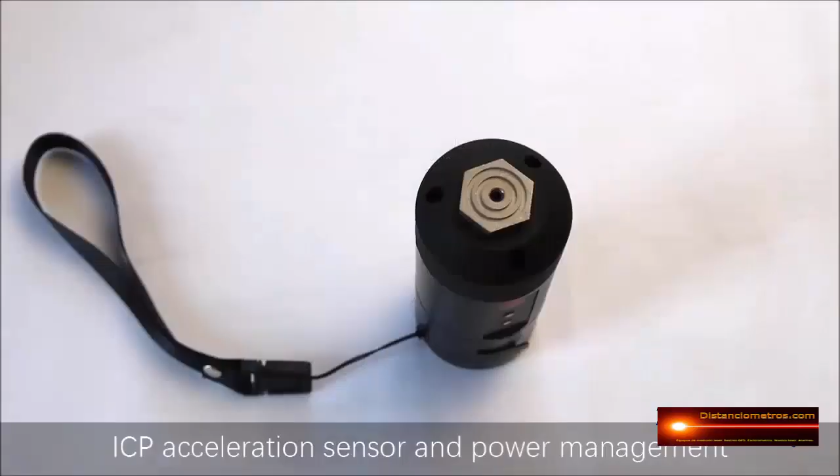The instrument consists of a host, Huawei tablet, hammers, and other accessories, and a power management circuit, etc. are all enclosed into the dynamic detector host. The hexagonal metal part at the bottom of the host is the ICP acceleration sensor.

This red button is the power switch. The charging indicator is just above the power switch. It is red when charging and it turns green when the host's battery is full. Above the charging indicator is the working indicator.

If the working indicator is red, it means the host is in low power condition. If the working indicator is green, the host can work normally. And if the working indicator flashes red and green, it means the host is pairing with the pad.

Open the protective cover, you can see the charging part. You'd better cover it when not in use so as to protect the host. Our specialized software is installed in the pad with Android system, and the software can transfer, analyze, and store the test data received by the host.

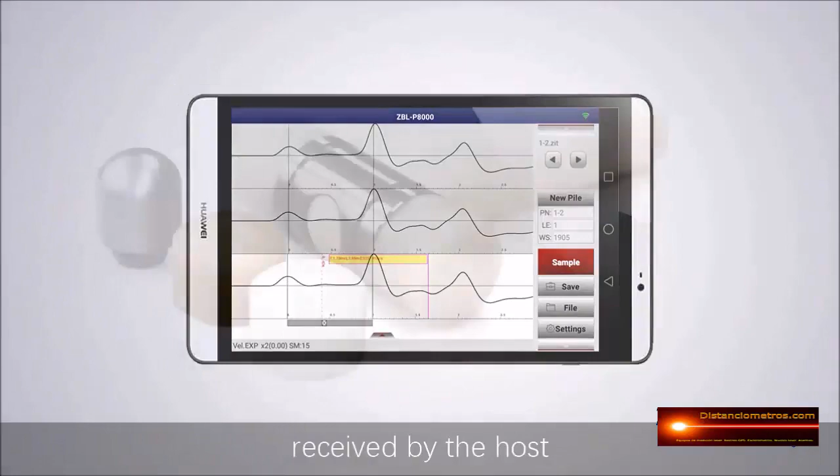Hammer. We use the hammer to strike the top of the pile to produce a stress wave. We provide you several hammerheads of different weights and materials.

The stress wave frequency caused by the striking of the aluminum alloy hammer is pretty high, which is suitable to judge the shallow flaws of a pile, while the stress wave frequency caused by the striking of the nylon hammer is rather low, which is suitable to judge the pile's deep defects. Besides, you can purchase another force stick as a striking device if the pile you test is too long and big.

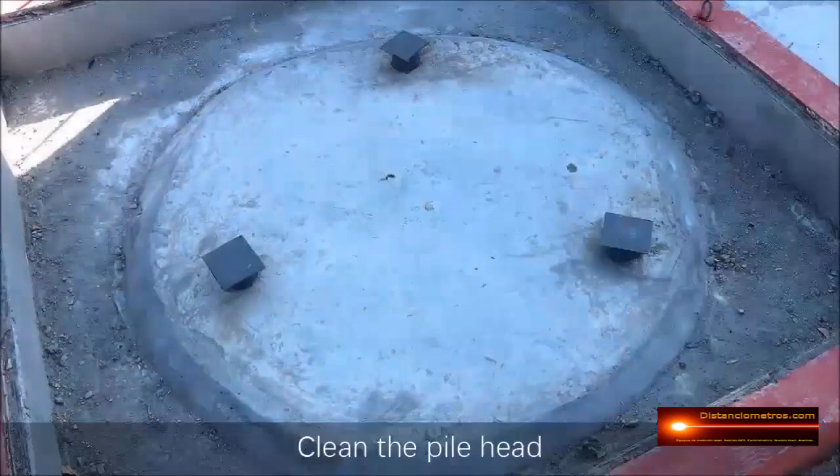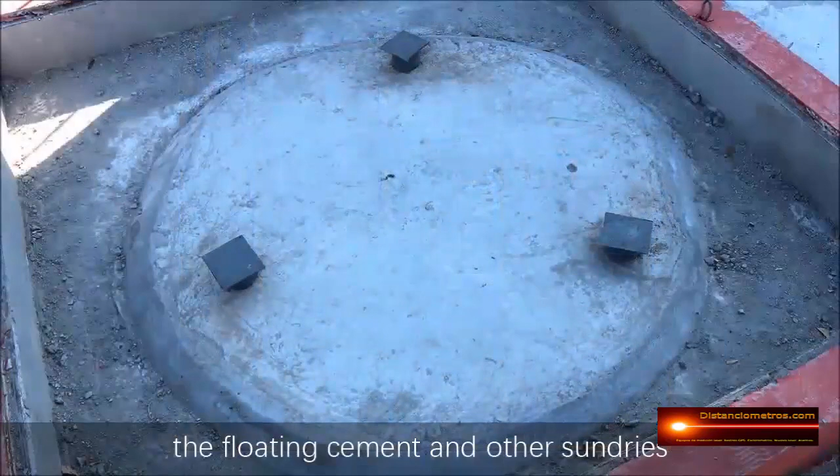Instructions. We should do some preparations before testing. Clean the pile head. The coupling point of the sensor and the striking point of the hammer must be clean, flat, and hard, so it is necessary to treat the pile head before testing. Clean the floating cement and other sundries on the pile head. The coupling agent should be thin but with great viscosity, and this viscosity should not be affected by water. We use butter here.

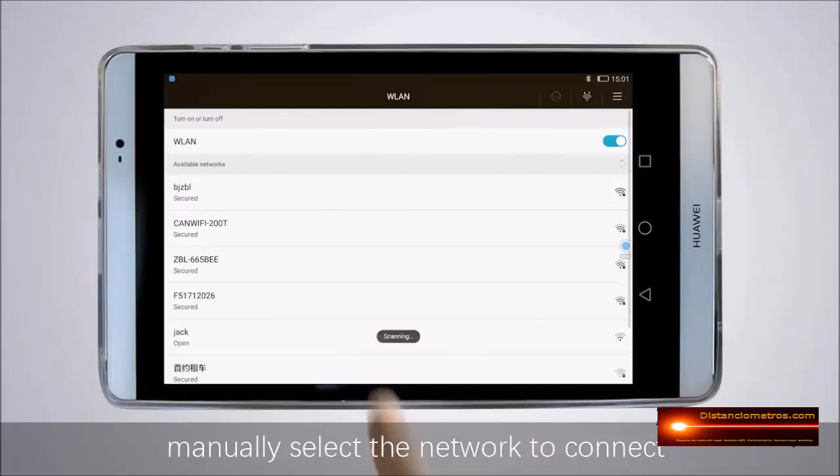Press the power switch to start up the instrument. Turn on the pad and find the application P8000 wireless pile dynamic detector on the desktop, and then click and open it. Click the Wi-Fi icon on the upper right corner to enter the network setting interface. Manually select the network to connect and input the right password. After a successful connection, the Wi-Fi icon stops flashing. Battery level is displayed.

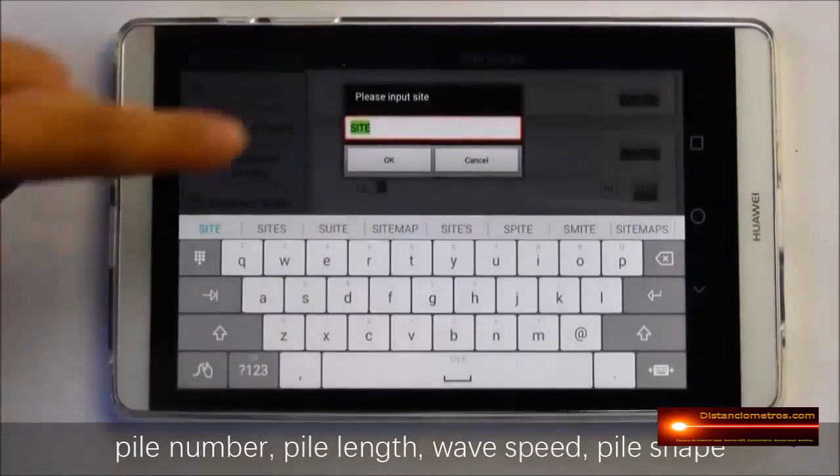Parameter settings. Click the Pile parameter button. You can set a project name, pile number, pile length, wave speed, pile shape, pile diameter, and pile type according to the project's real information.

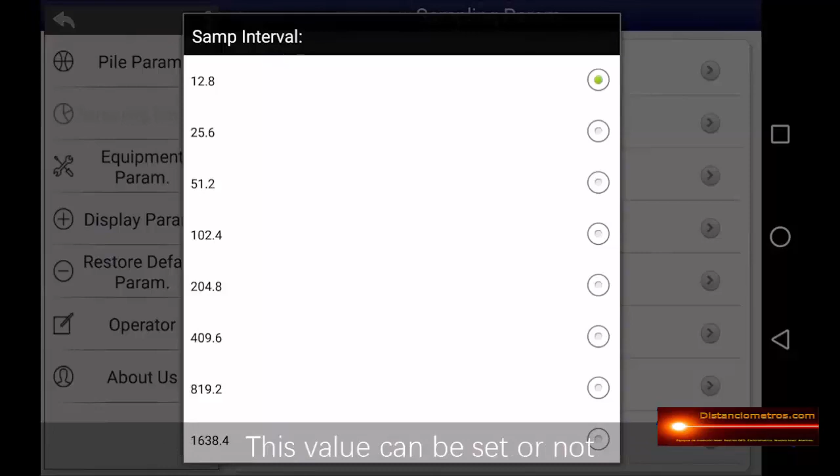Click the Sampling parameter button. Sampling interval refers to the time interval between every two sampling signals. You can select one of the 9 intervals. The value can be set or not, but pile length and velocity must be set before sampling so that it will automatically calculate the sampling interval value.

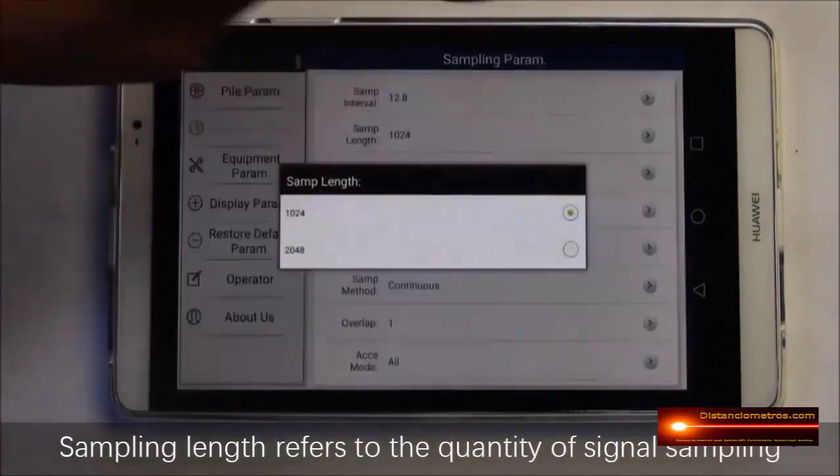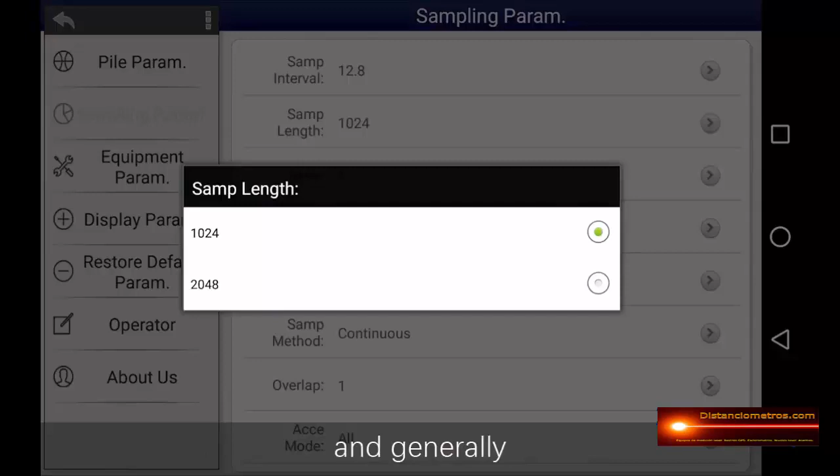Sampling length refers to the quantity of signal sampling points, and you have two choices, 1024 and 2048. Generally, 1024 can meet your requirements. Blow number refers to the total number of waveforms that every channel selects. There are multiple options. Minimum is 1, maximum is 12.

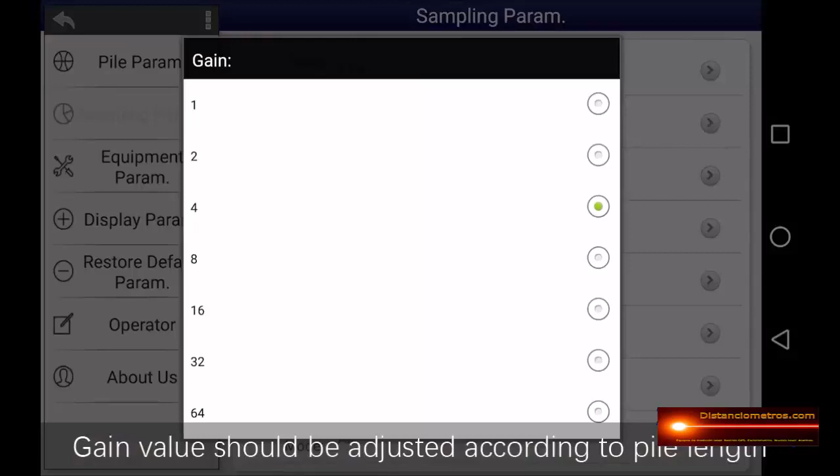Gain refers to the amplification factor of the signal which is received by the sensor. Generally, the gain value should be adjusted according to pile length, condition of the pile head surface, and striking equipment, hammer, etc. When the signal is weak, you can turn up the gain value. When the signal is strong, you'd better turn down the gain value.

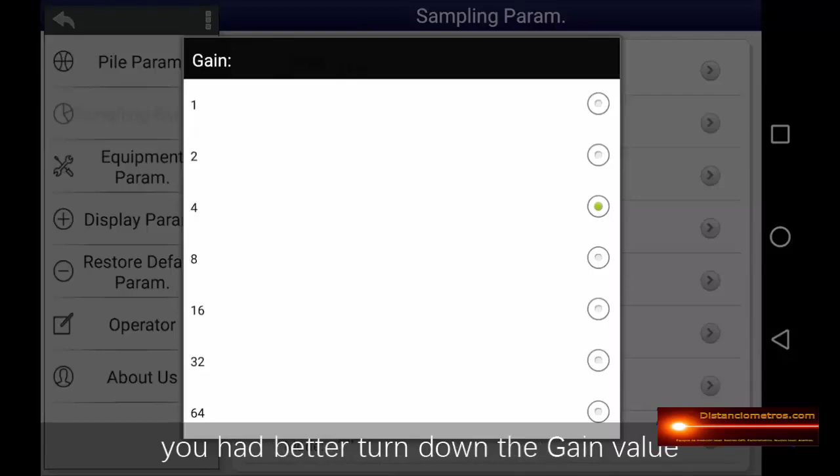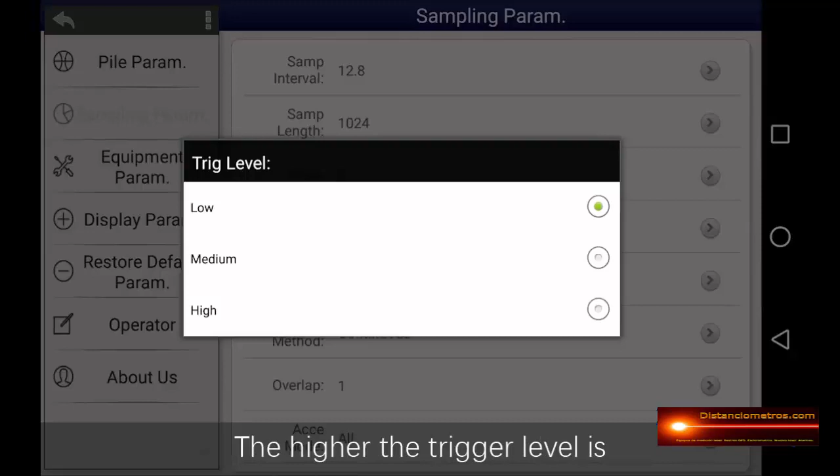Trigger level refers to the signal level collected when starting the instrument. There are 3 levels, low, medium, and high. The higher the trigger level is, the stronger the signal required. Generally, you'd better choose low level when the gain value is less than 8, and you'd better choose medium or high level when the gain value is more than 8.

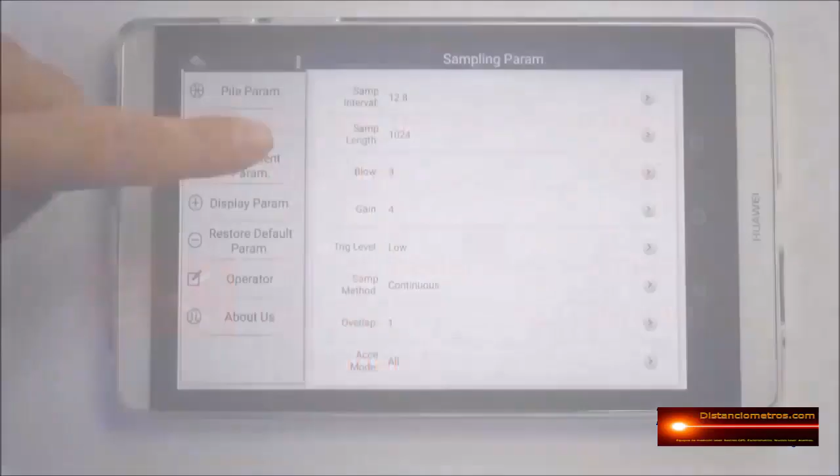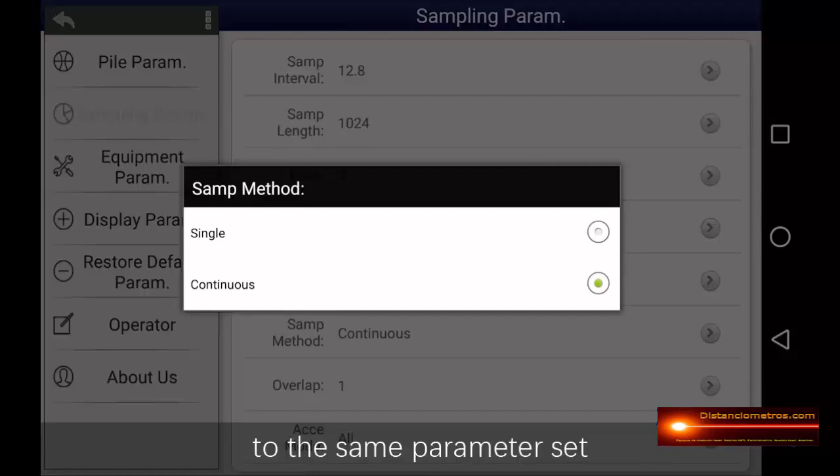Sampling method. There are 2 methods, single collection and continuous collection. Single collection means according to the parameter setting, only one waveform can be collected once. Continuous collection means according to the same parameter set, continuous multiple waveforms can be collected until the acquisition is stopped.

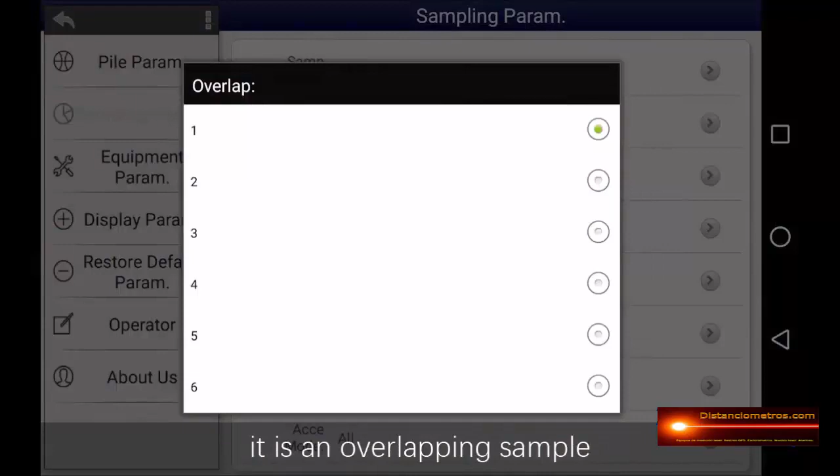Overlap. You can choose a number between 1 and 6. If the number is bigger than 1, it is an overlapping sample, which means all the samples collected in the same channel will be added together and then averaged.

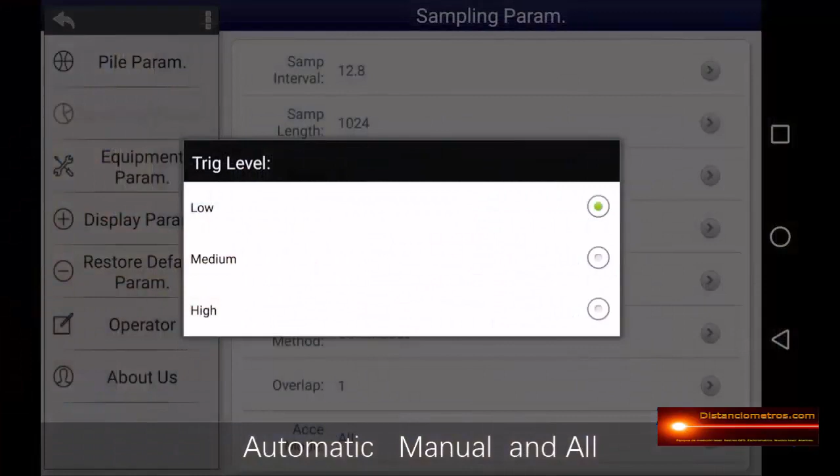Acceptance mode. 3 modes are accepted: automatic, manual, and all. In automatic mode, if the strike is too heavy or light, the dynamic detector will automatically abandon the signal while showing the corresponding message. Only when the percussion is moderate will the collected signal be a useful one.

In manual mode, if the strike is too heavy or light, the dynamic detector will give an appropriate message and ask whether to retain the signal or not. When the all mode is selected, if the strike is too heavy or light, the dynamic detector will give the corresponding message and keep the signal.

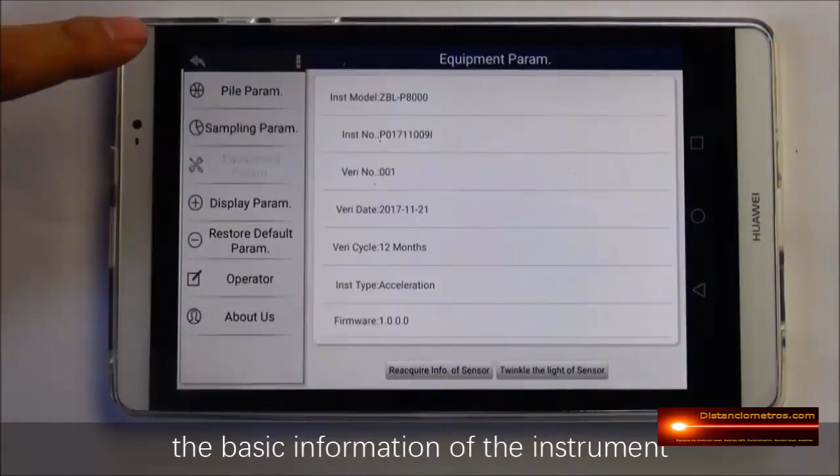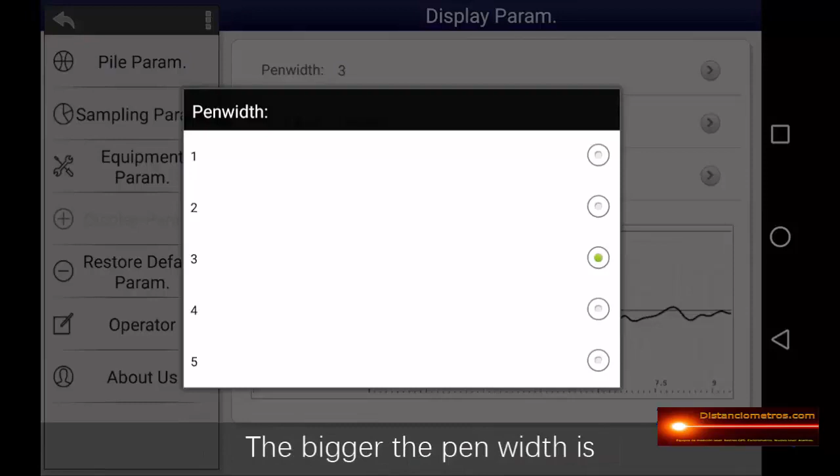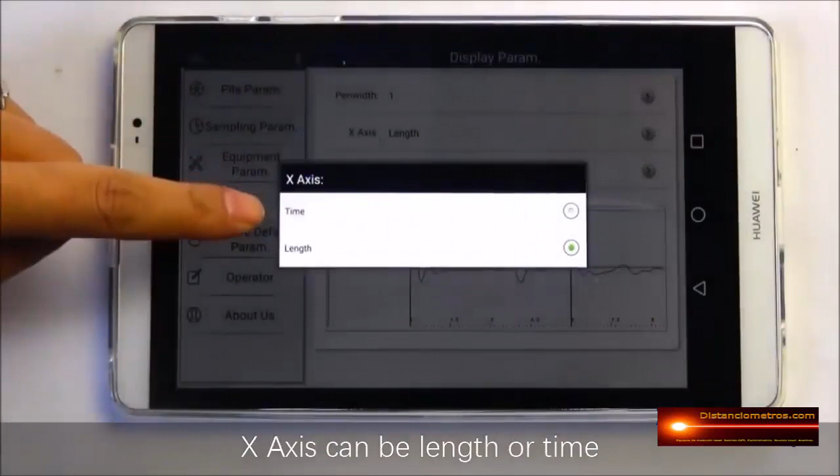Equipment parameter shows the basic information of the instrument. Click Display Parameter and it switches to the Display Parameter interface. Pen width refers to the width of a signal channel waveform. The bigger the pen width is, the wider the waveform is, with the default as 1. X axis can be length or time, and generally we choose length.

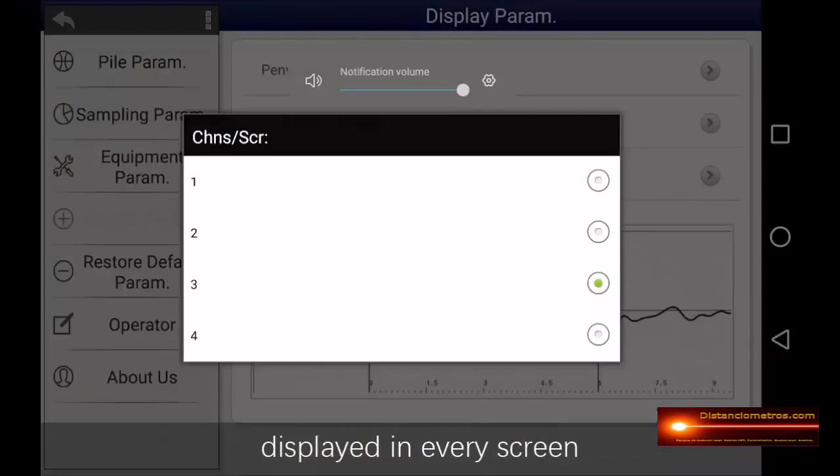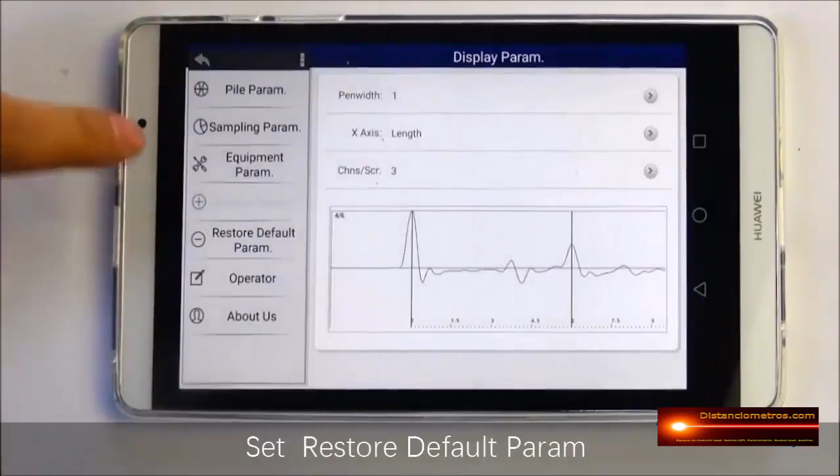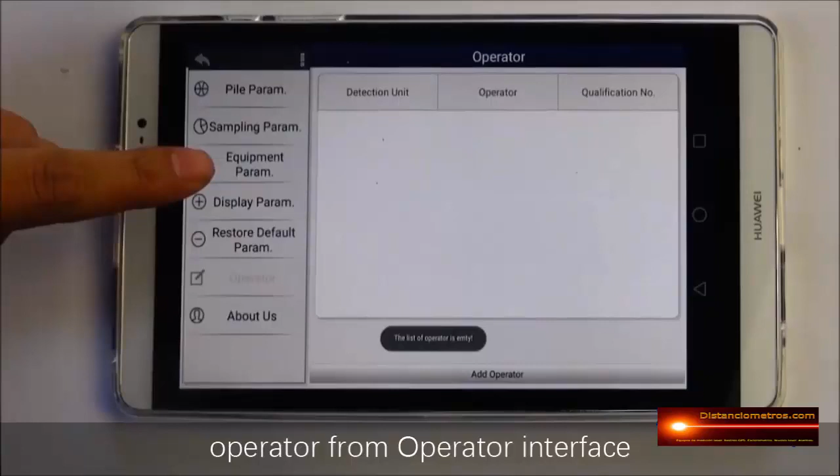Channels per screen refers to the amount of waveform display in every screen. Options are 1, 2, 3, or 4. The number in every panel cannot be bigger than the sampling number. Set restore default parameter. You can choose to recover some parameters. You can set the information of the operator from the operator interface. After setting all parameters, return to the sampling interface.

Pile test. You can choose 1 to 4 testing points according to how big the pile is. Defects or cracks are not allowed at the installation points of the sensor or somewhere near it. When the hammering point is at the center of the pile head, the distance between the installation point of the sensor and the center of the pile shall be 2/3 of the pile radius.

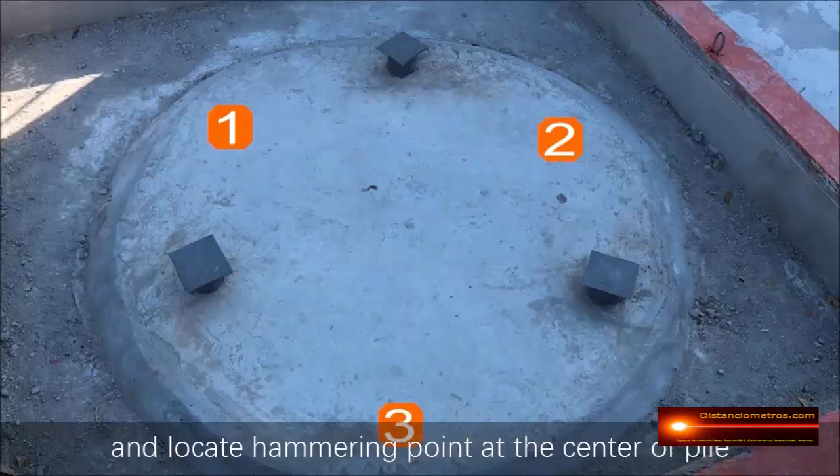When the hammering point is not at the center of the pile head, the distance between the installation point of the sensor and the striking point shall be more than half of the radius. Take a 1 meter diameter pile as an example. We choose 3 testing points and locate a hammering point at the center of the pile. The sensor and the testing point should be completely stuck together by butter or petrolatum, and ensure the sensor is vertical to the top of the pile.

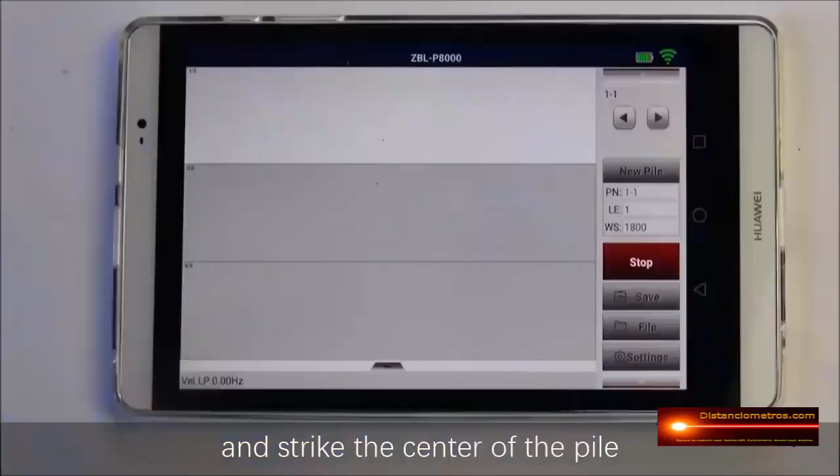Click Sample button. Place the sensor at the first testing point and strike the center of the pile 3 times with the hammer. Click Stop button. Then place the sensor at the second testing point and strike the center of the pile 3 times with the hammer. Click Stop button. At last, place the sensor at the third testing point and strike the center of the pile 3 times with the hammer again. Click Stop button after you have finished the sampling work.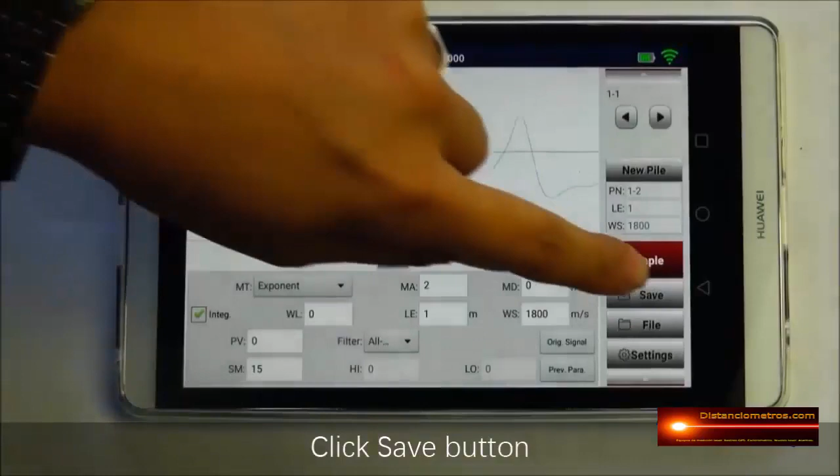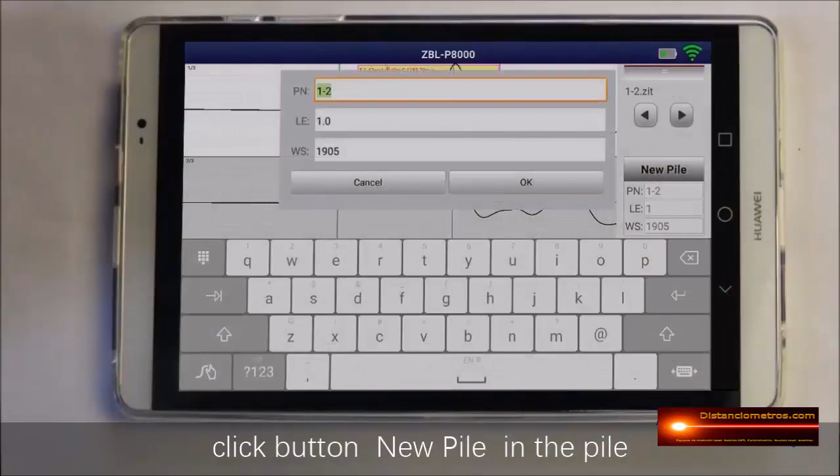Click Save button. The default name is the pile name set before the test, and you can save directly if you don't need to change it. Then we finish the test of the pile. If you need to continue to test other piles, click the button New Pile in the pile information area on the right side. Then you can continue to detect the next pile.

After you have tested all the piles, data can be transferred to your computer for analysis and report generation. Click File button and select FTP Upload. Enter username and password, and click Start button. The IP address for data access by PC will be generated.

Input such IP address in the computer address bar according to below suggestive address. A dialog box will pop up asking you to enter the same username and password. Then you can find out all data files. Select data files and copy them into PC.

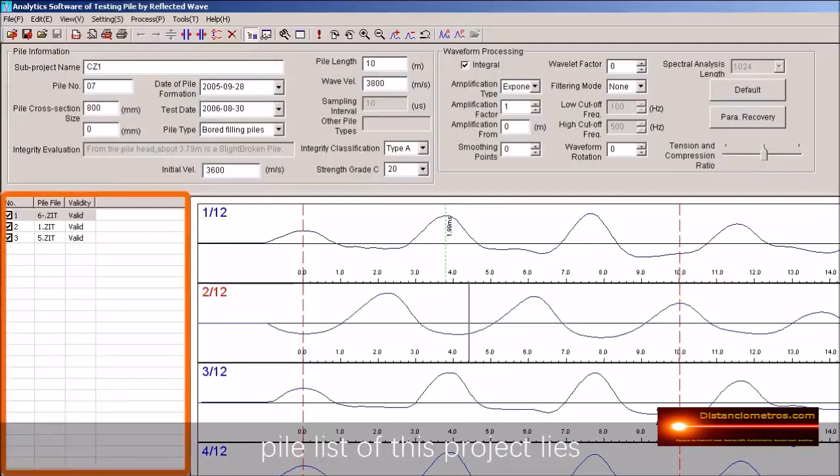Data analysis. Click and open Analytics software of testing pile by reflected wave. Click File button and find the file you want to analyze and open it. The middle part of the software interface is wave diagram area. Pile list of this project lies on the left side of wave diagram area. Pile information area and waveform processing area lie above wave diagram area.

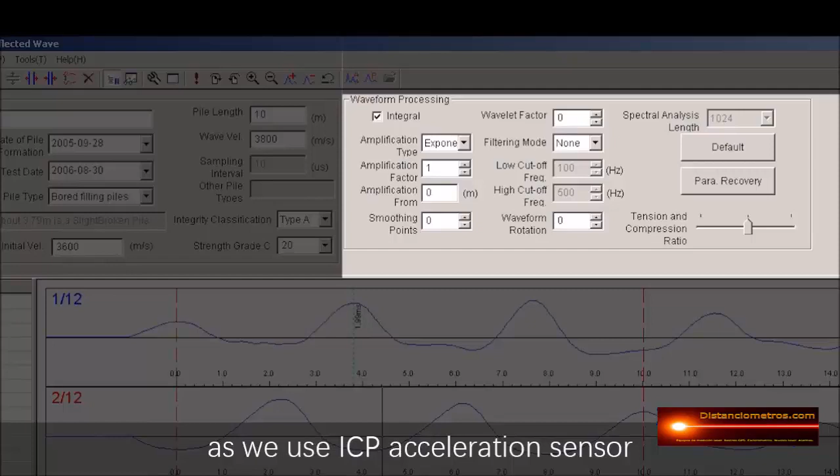You can further improve or modify the pile's information in pile information area on the left side. Look at waveform processing area on the right side. You should choose integral as we use ICP acceleration sensor. Wavelet factor can optimize the signal through wavelet analysis method. And the bigger the wavelet factor is, the smoother the signal diagram is.

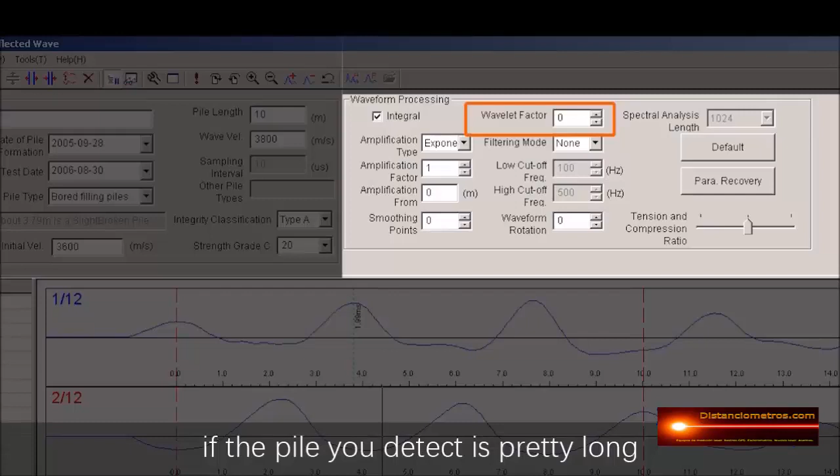Generally, wavelet factor should be set between 1 and 3, but you can set a bigger wavelet factor if the pile you detect is pretty long. If the wavelet factor you set is too big, some useful signals will be filtered out, causing misjudgment.

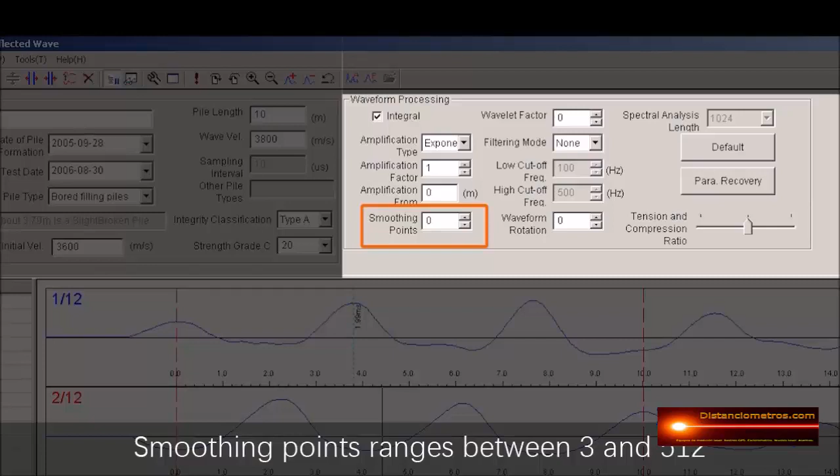Smoothing points refers to how smooth the signal diagram is. The bigger the smoothing points is, the smoother the signal diagram is. Smoothing points range between 3 and 512, and generally it is set at 10.

Amplification type, you have 3 kinds of choice: exponent, linear, and full scale. Usually, we select exponent. Its characteristic is the signal will be magnified on exponent. As for amplification factor, you can choose according to your need. Amplification from means the starting place to magnify.

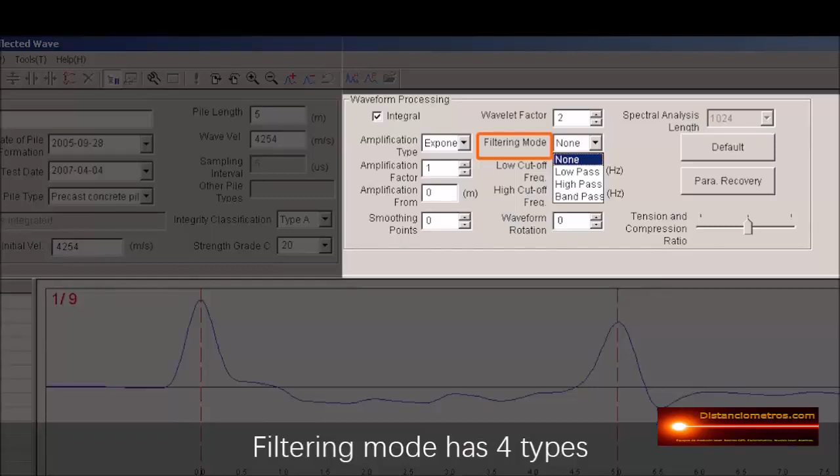Filtering mode has 4 types: all pass, low pass, high pass, and band pass. Low pass can filter out the signals higher than a certain cutoff frequency. High pass can filter out the signals lower than a certain cutoff frequency. Bandpass can filter out the signals higher than a certain cutoff frequency and at the same time lower than a certain cutoff frequency. Usually, we choose low pass more.

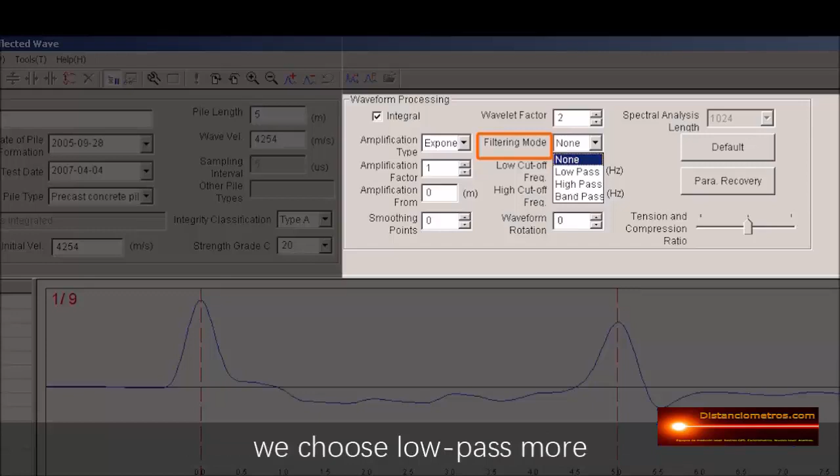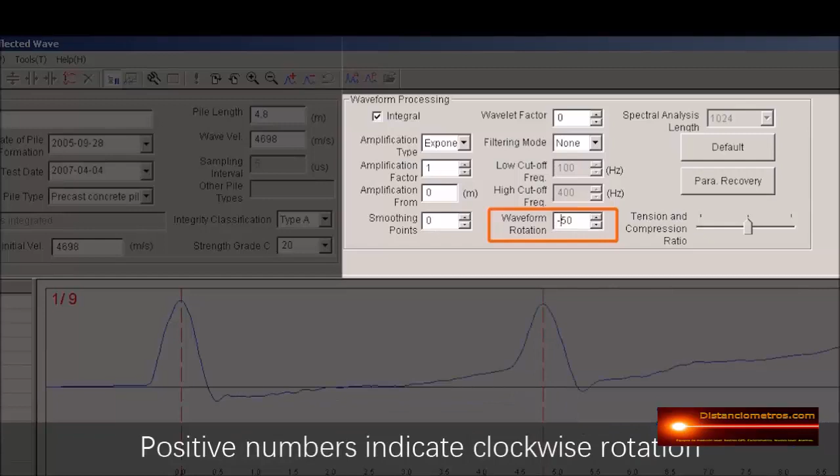Waveform rotation. Sometimes after the integral processing of the signal, the end of waveform will be upturned. Then the waveform needs to rotate, making the end back to the position of the baseline. The percentage of the rotation is relative to the amplitude of direct wave. Positive number indicates clockwise rotation, while negative number indicates counterclockwise rotation.

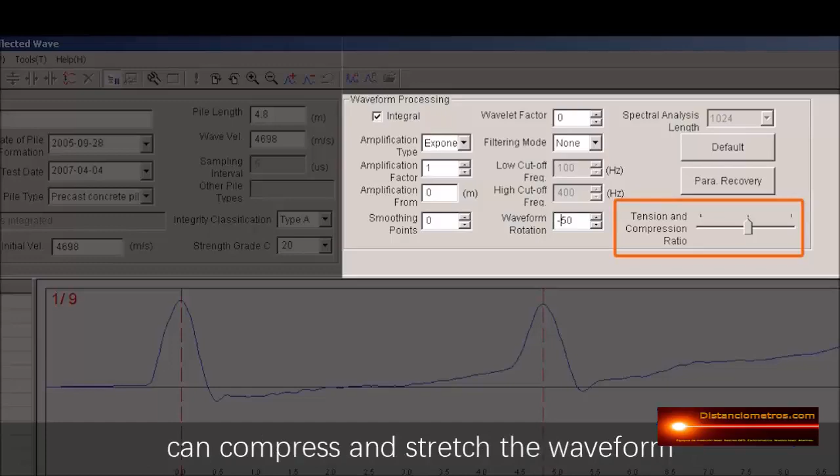Default means user set all parameters as the recent one. Parameter recovery means user set the parameters value as the default one. Tension and compression ratio means users can compress and stretch the waveform. Now we will analyze several typical waveforms.

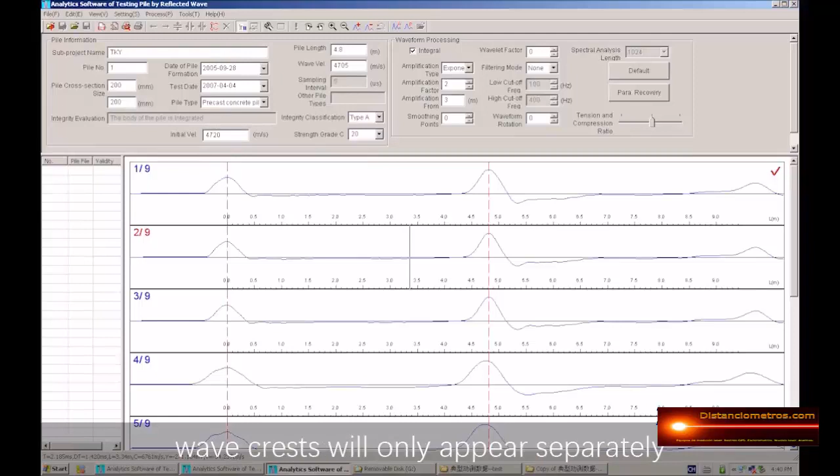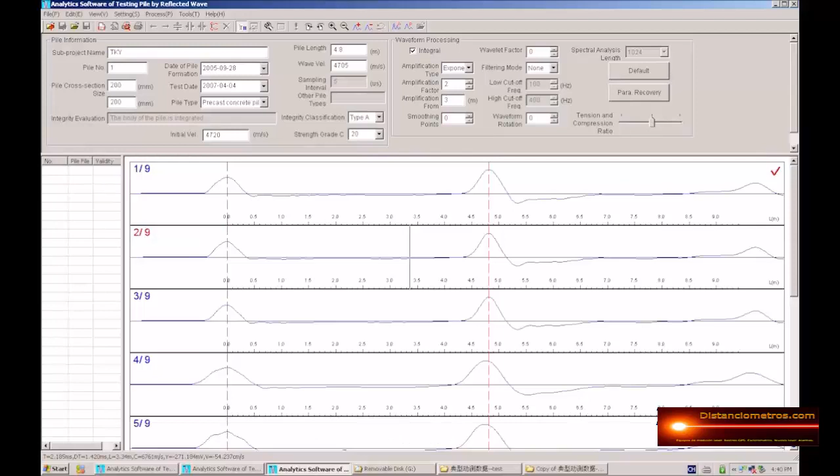Good pile waveform. As the waveform from a good pile, wave crest will appear separately at pile head and pile toe. And if pile body hasn't defects, the waveform diagram between the pile head and pile toe will be a straight line. Double-clicking on the waveform area stretches the waveform vertically.

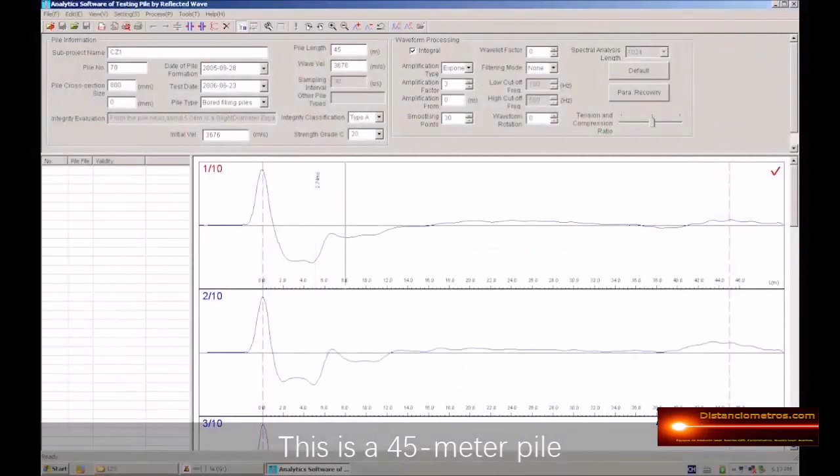Expanded pile waveform. This is a 45-meter pile, and the first wave crest is the pile head, and you can find another wave crest at the pile toe, but a significant wave trough appears at about 5 meters. This is a typical waveform of expanded pile.

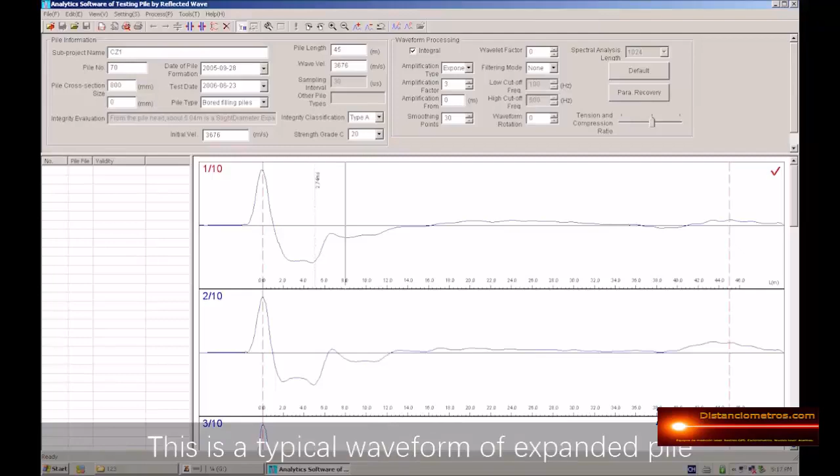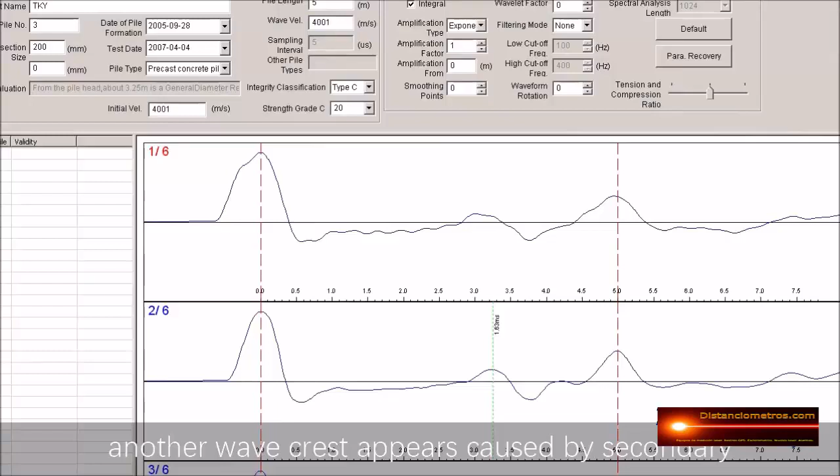Reduced pile waveform. Except for the wave crest at pile head and pile toe, another wave crest appears, caused by secondary reflection of a reduced pile. This is the typical reduced pile waveform.

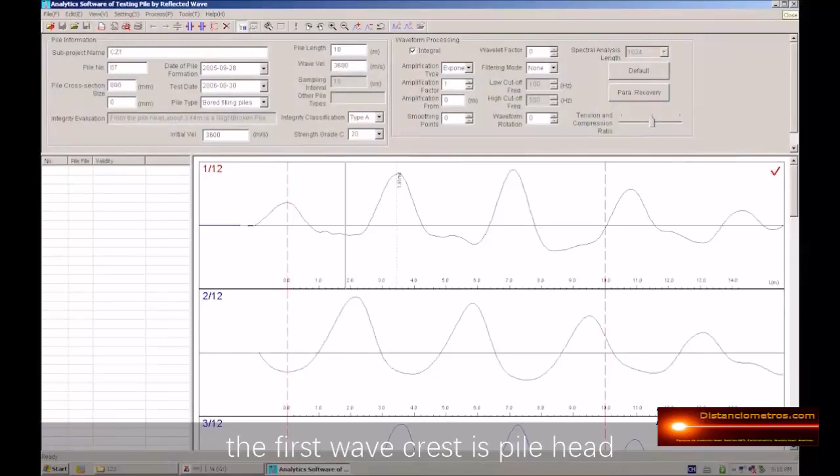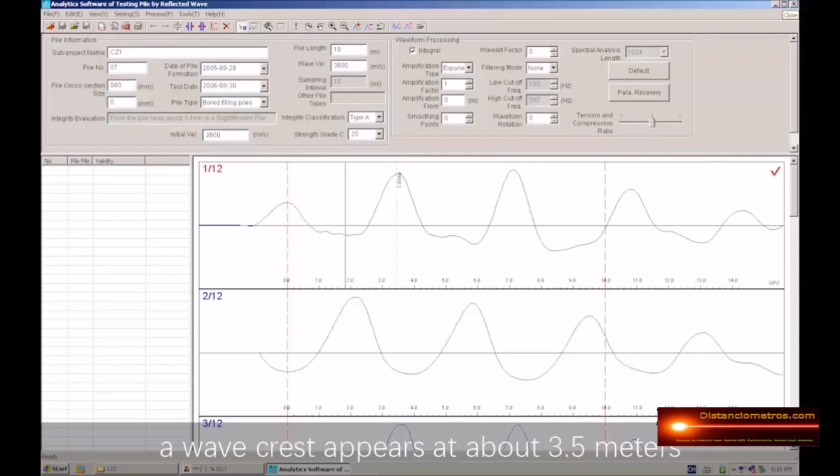Broken pile waveform. In this waveform, the first wave crest is pile head. This pile is 10 meters, so the pile toe wave crest is supposed to appear at 10 meters, but it doesn't. You can see a wave crest appears at about 3.5 meters, and you can also find other wave crests every 3.5 meters. This is the typical waveform characteristic of a broken pile.

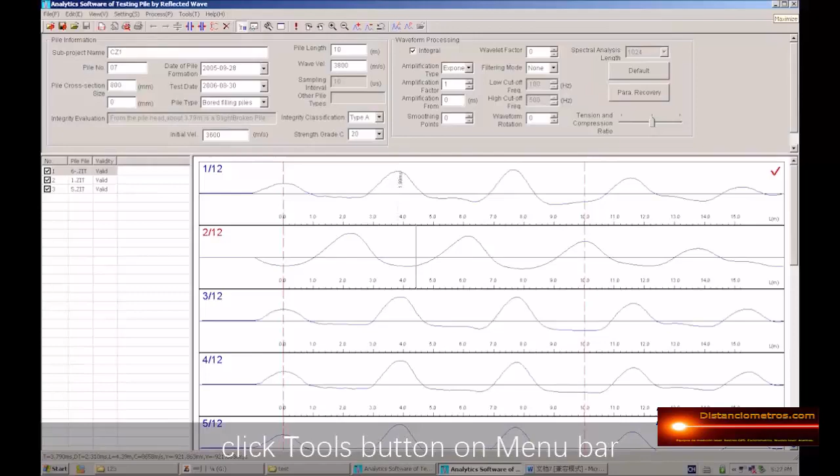Create a report. When you create a report, choose the IT files on the pile list area, click Tools button on the menu bar, click Export Word File button, and then create a report and open it. Now, the instructions of wireless pile dynamic detector ZBL-P8000 has ended.